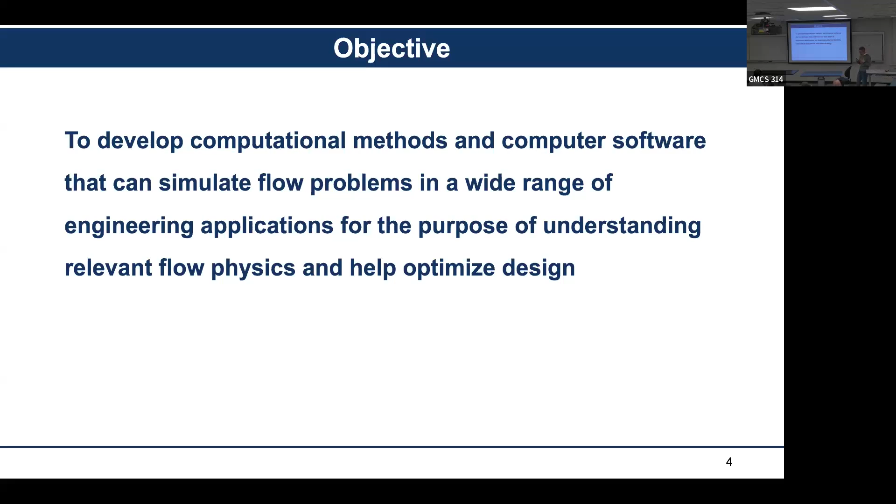And also being able to optimize the design of the airplane, the gas turbine engines, or the rocket engines. So I've been in this for quite a while, and we would like to have a computational package with different methods that is able to handle complex geometry, because most of the examples that I showed you that I was involved in involve a lot of complex geometry.

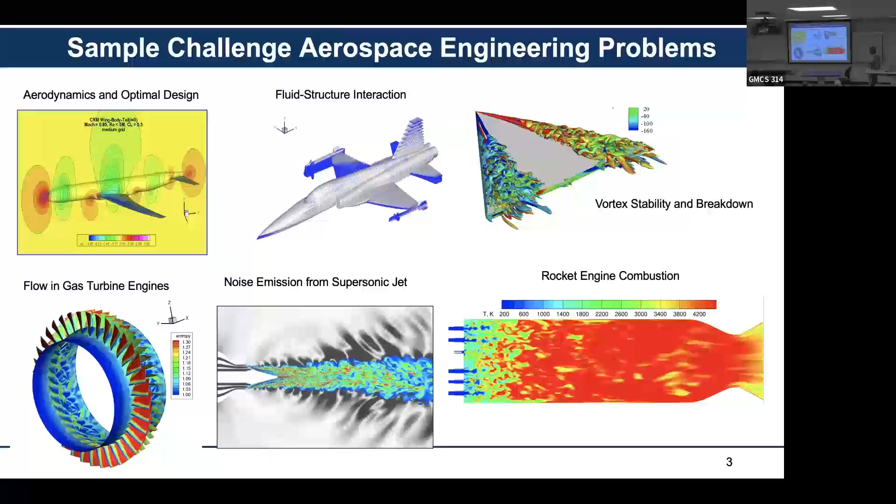And again, you can see just from the movies over there, we have a lot of spatial and time scales that we need to resolve. There are different scales involved in here, moving and the scales for the sound too. So we need to have a code that is actually able to resolve the different spatial and temporal scales. And that's always a challenge for computational science.

On one hand, you want to resolve the large scale of the airplane, the scales over the size of the airplane, say the Boeing 747 will be close to 70 meters or so. And then the Kolmogorov scale of turbulence is very small. And similarly in time, with sound emission, you are interested in 20 hertz to 20 kilohertz, the whole span. It's not just one narrow area, which would be easier to work with.

And so I want to basically motivate you students by saying there are tremendous opportunities because of the wide spectrum, time and space, and because of nonlinearity. Because if it's linear, you can always separate it, study each scale separately. Because of nonlinearity, the different length scales and different time scales all interact. One scale affects the behavior of the physics in other scales, and that's the difficulty. So there's a tremendous challenge in it.

And then the other thing is multiple physics. For this case, we have fluids and we also have structures. We have turbulence and we have reactive flows. At least the few that I have been interested in, or have had the opportunity to work on.

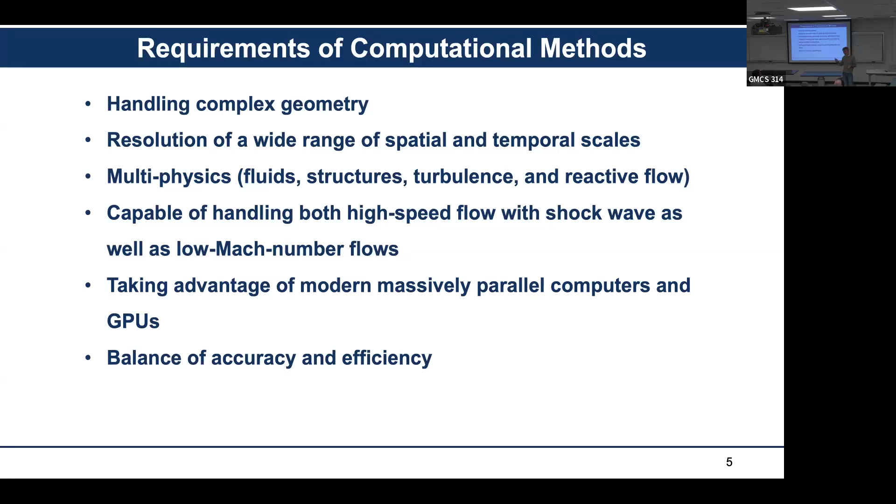Anyway, for the majority of our problems, we have to be able to balance efficiency, so that you can solve most problems, with the kind of accuracy you can get. And that's what we have had to deal with over the years. Because of these constraints and desires, we have developed a code called ParCAE, and that's extensively used for almost all my research, except some of the theoretical studies.

ParCAE was originally named as a parallel code for aeroelasticity, and we were doing aeroelasticity studies like the F-16 oscillations. Then based on that, we evolved it into a general purpose CFD code that solves the Navier-Stokes equations by the finite-volume method, on multiblock grids, and we can handle quite a few physics, including flow, heat transfer, fluid structure interaction, and combustion.

The central part is the Navier-Stokes flow solver, and then we have the aeroelasticity solver that's coupled internally, or through an external package too. And then it recently evolved to include the chemical reaction solver, and those are basically the major parts of this.

And ParCAE, as I mentioned, well, we haven't changed the name. We should take a different name. But one of my former students, Mani Sadeghi, who's now at Pratt Whitney as a lead aerodynamicist and aerostructure mechanist, named it ParCAE because I didn't have a name, and he said ParCAE was apparently some Roman goddess.

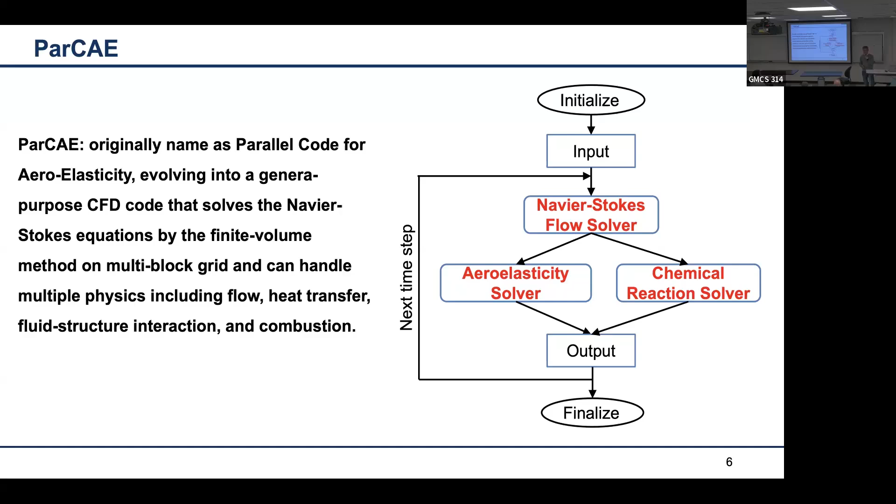Anyway, I'll just give a little bit of background on this. Here there are the three-dimensional Navier-Stokes equations, which also include an energy equation over here. This is formulated in either a stationary reference frame or a moving reference frame, where we want to deal with the rotor-stator interactions for gas turbine engines. So you could have a rotating reference frame, including Coriolis forces and so on.

Any body forces, where we have been using this to study plasma flow actuation, so we can include electromagnetic forces or ion forces in there. Over the years, we've built all different turbulence models. Originally, when I started the code, I coded only the SST turbulence model. Then we went into the SA and SST gamma with transition models, and the LES models, Smagorinsky, dynamic Smagorinsky, and WALE model. And we are incorporating all different technologies in DES, DDES, and so on.

These are just the basic equations that we were showing over here. We can treat two-dimensional, three-dimensional, axisymmetric. For low-speed flows, we have a preconditioner, and we are able to do subsonic and transonic flows. Originally this was all based on perfect gas, but because we're working with chemical reaction problems, where in the rocket engine we have non-perfect gas, we incorporated some non-perfect gas laws in there too.

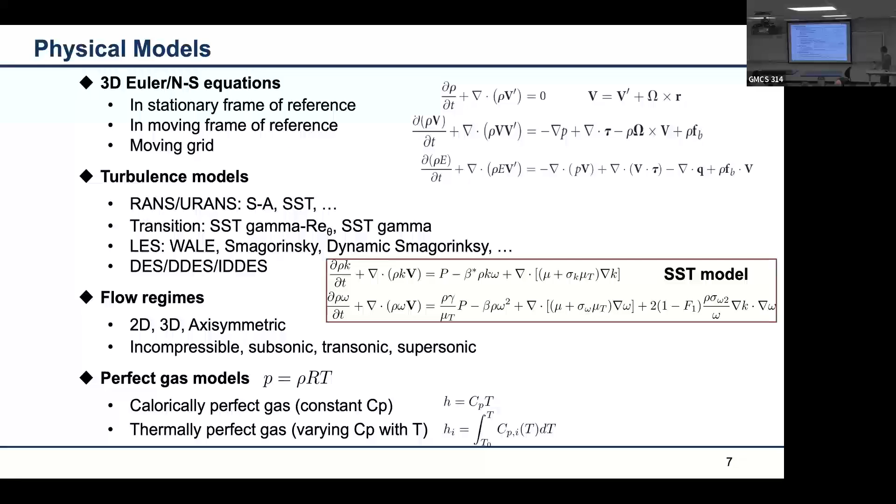This is the basic algorithm. It's very simple. It's the finite volume scheme. If you have a conservation law, and Revere was asking me why you call it conservation, this is because it's the divergence form. This is the source term, this is the variable being conserved, and then the divergence of the variable. Why do you call it the conservative form?

When you integrate it over a control volume like this hexahedron, you get the integral of the time rate of change of the conserved variable in this volume related to the surface integral. In other words, whatever flux is going through the surface, it's all conserved. If you integrate over the whole domain, the internal fluxes cancel, and what you have is the source term contributing to the rate of change.

These equations are very general, not only for fluid mechanics; you can formulate a lot of physical problems in terms of conservation laws. Now, we discretize it over a grid cell, like shown over here. The major problem is the discretization of the fluxes, how you represent the surface integral. We start from the integral equation because in principle we would like to be able to deal with shock waves. Shock waves are discontinuous.

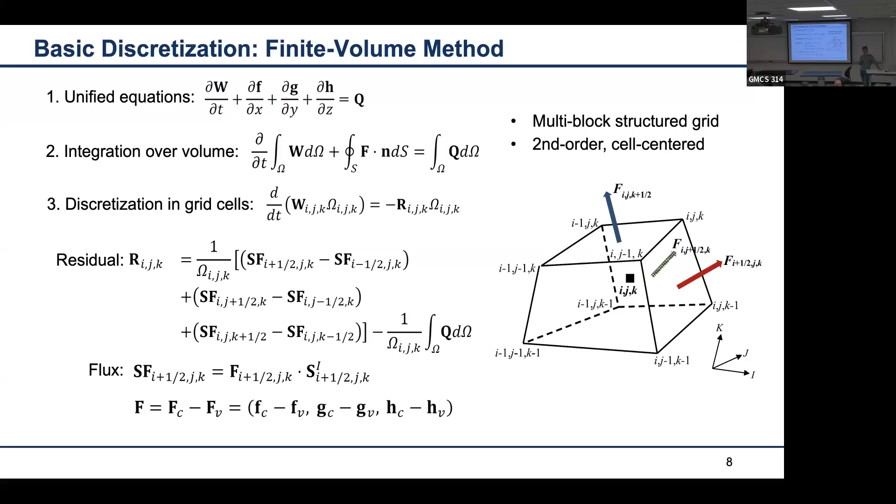That's called non-oscillatory solution. So in order to do the convective fluxes, there are various schemes that are currently more used in the community. Some of them are from our group. Some of them are by people like the Van Leer splitting and the Roe scheme, which has been very popular. And what we have in our group is mostly the JST scheme on our own.

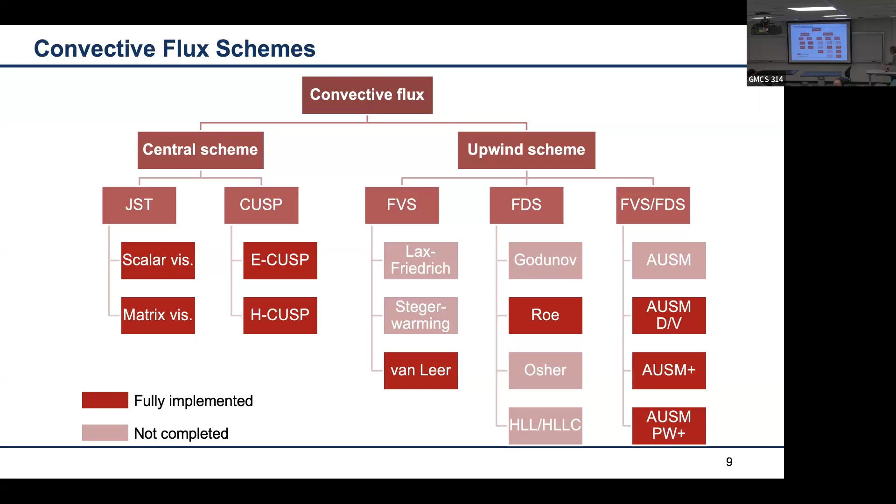Some of this is more from, I don't know. Fletcher knows him. He's at NASA Glenn too. He passed away already. I forget his name. It's actually Meng-Sing Liou. You don't know him, but anyway, he passed away because of cancer. He's about my age, but anyway.

These are the schemes. I'm not going into details, but this is the scheme that our group has been using, and it's basically simply a central differencing scheme, but with some numerical dissipation. But the dissipation has to be able to distinguish waves that travel in different directions. Because in flow problems, you know from characteristics that some characteristics go left, some go to the right, meaning that some waves will travel left.

If I'm standing over here, my sound goes left and right. But if I'm moving with the fluid, then some waves become faster, some waves become slower. If I move supersonic, all waves go in one direction. You cannot hear from the other side. Any numerical scheme, in order to handle the convection correctly, needs to reflect the original physics, in other words, reflect the wave directions. And this is just a way of distinguishing the different waves.

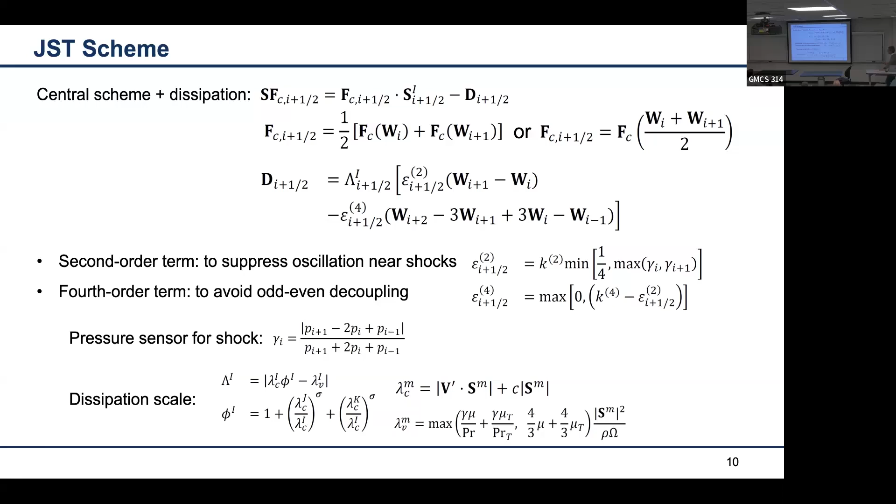And this is particularly important when you have a shock wave, and we have a shock sensor that will sense the shock and then decide what schemes we need to use. And this is the Roe scheme. Phil Roe initially started that approach, and then we have our own versions of it. That's basically what I was talking about: distinguish the waves due to contact surface, due to the upstream wave, expansion wave.

There's a shock wave. This is actually a rarefaction wave, this is an expansion wave, and this is a contact surface. In other words, we distinguish all of these in our algorithms in such a way that we can reflect the original physics and therefore produce non-oscillatory solutions over shock waves. And that's a major issue with high-speed flow. And this will be significantly more severe for high order schemes.

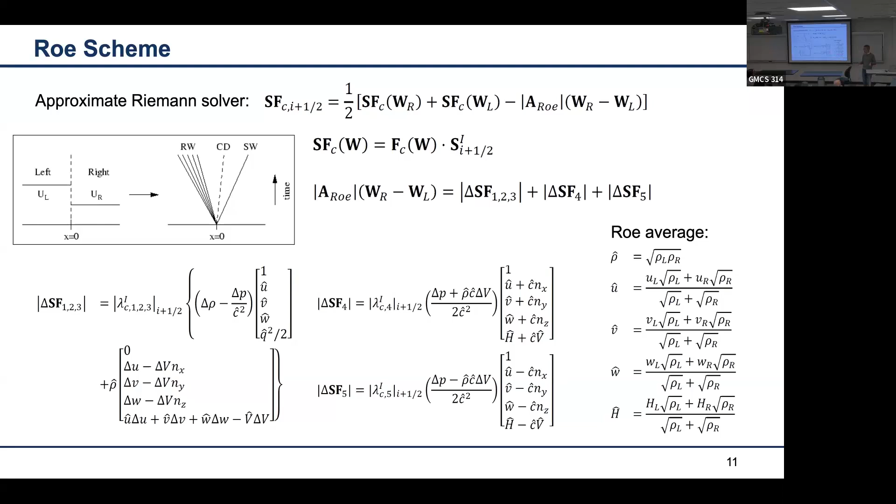High order schemes, in terms of mathematics, with a Taylor series expansion, the truncation error is proportional to the grid size to a higher order: third order, fourth order, fifth order. On the other hand, it uses more points. And you all know, even in interpolation, if you interpolate a function over more points, it becomes more oscillatory. It's more likely to produce wiggles. The same thing happens in computational methods. The way you eliminate that is to distinguish the different wave directions, using upwinding type schemes, and also using limiters.

And this is the reconstruction. It's like what I mentioned: given a set of points, how you would interpolate that function to construct the fluxes. The more points you use, the more accurate in terms of mathematical accuracy, but the more likely you are to produce oscillatory solutions. In fact, these are very relevant topics even nowadays, if you're doing machine learning and using neural networks.

And what neural networks are doing is more of a nonlinear type of interpolation algorithm, functional interpolation. And there, each neuron is basically represented by a lot of weight functions and an activation function. It's like providing basis for interpolation. The more neurons you use, it's like the more points I'm using in constructing my interpolation function in my numerical method. And the more layers you use, you are essentially stacking up more of these interpolations.

And then there is the issue. If you use more neurons, more layers of neurons, deeper learning, you're more likely to fit more data, and you need more data to do that. And you're more likely to have a better, accurate prediction. On the other hand, your solution is more likely to produce hallucination too, because if you extrapolate using this type of thing, it gets nonsense, right?

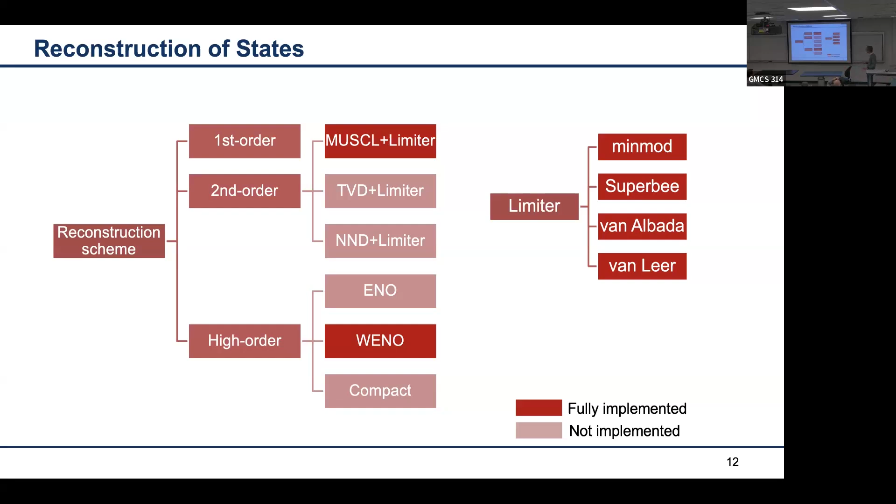So it's actually relevant in the sense we have to balance somehow reliability versus validity or accuracy. And considering all these nonlinear problems, the limiters, I'm not going into details, but we have implemented some, including WENO, and I saw on the second floor your center has students working on a third order WENO scheme. So these are the few things we worked on. Some we implemented, some we didn't think were worth it, and some we did our own versions to tailor to our particular applications.

This research is very relevant because even in the modern machine learning era, many concepts are very much related. Interestingly enough, we just had our program review on Tuesday from the Navy. We're doing turbine-burner research. And before that, we had an Air Force project, and a different Air Force program manager passed by our program.

You probably know Chiping Li, and he was saying that at his contractors meeting, mathematicians, physicists, and engineers were all together, talking about using data simulation, the new machine learning type of methods, for studying rocket combustion problems. The mathematicians talk one language, the physicists a little bit different. But in the end, the mathematicians always say, we have this mathematical trick to do this and that. And what he was saying is that a lot of these mathematical tricks that worked can be traced back to some physics that you obeyed, and therefore it worked. That's interesting.

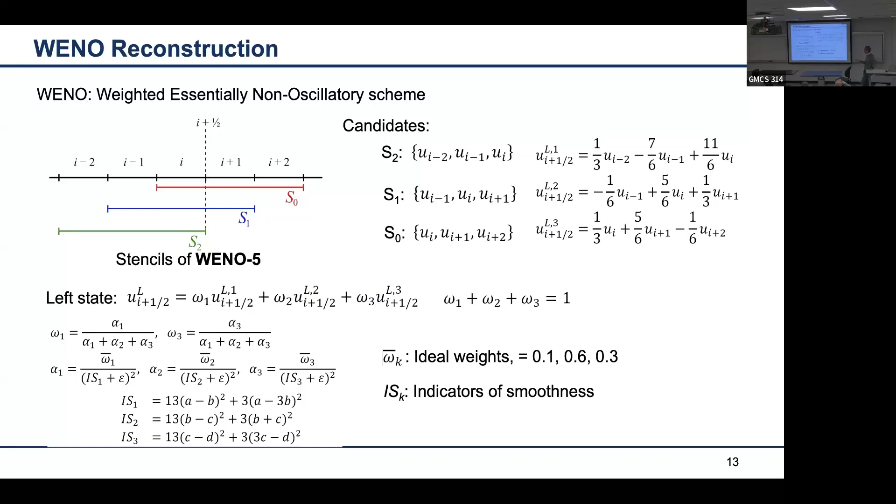I was thinking that with a lot of these numerical schemes we developed over the years, we also have the same issue: we really have to think about the original flow problems. What are you trying to resolve? What are the physical wave propagation or diffusion mechanisms? Okay, I think I'm taking too much time.

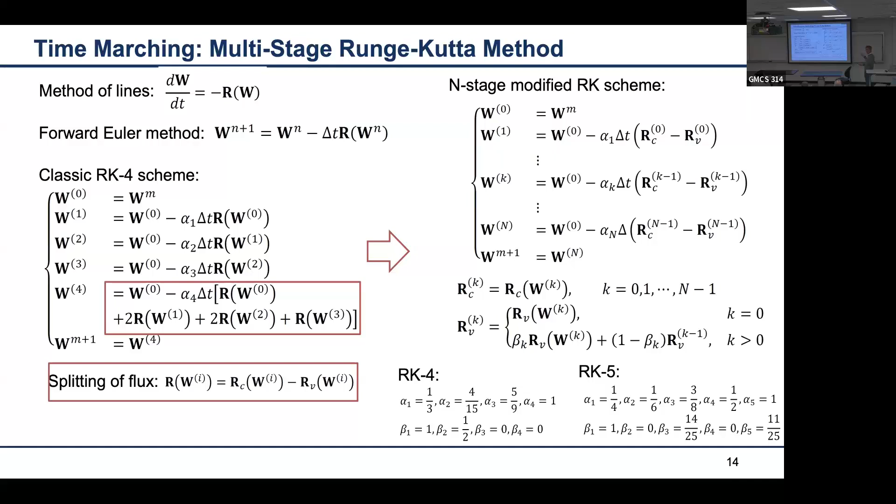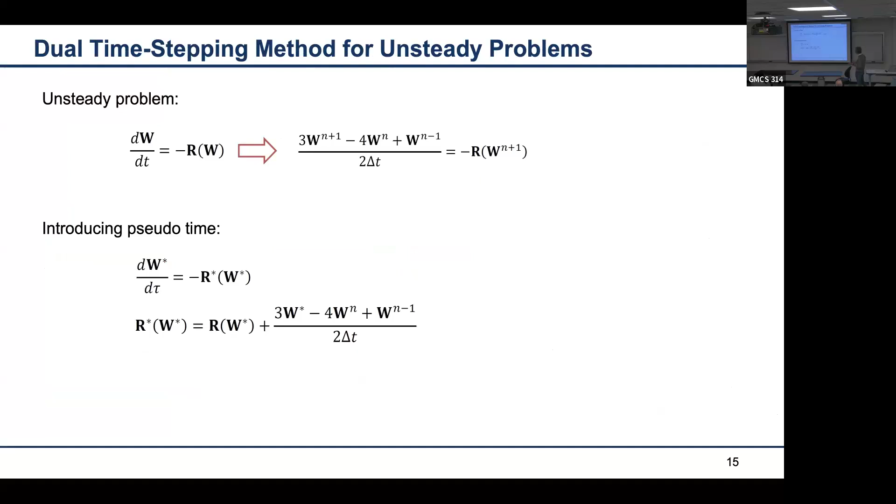Now, we have developed our own. I saw downstairs a student presenting on a third order Runge-Kutta scheme. We have our own newly developed Runge-Kutta scheme. We usually use a 4-stage or 5-stage scheme where we tailor our coefficients based on stability analysis, and we have a way of splitting the diffusion and convection. Our Navier-Stokes equation is basically diffusion reaction. We have a way of doing time accurate using the pseudo-time method. I'm going to skip that.

But the major thing here is we formulated an implicit LU-SGS method, which can be effectively applied on parallel machines, taking advantage of a splitting algorithm to handle the stiffness due to chemical reaction. With chemical reaction, the time scales can be widely spread, some reactions very short, some very long. Our numerical scheme time step is always limited by the shortest time scale, the fastest chemical reaction. So we have to handle them separately.

We attack this problem in several ways. One is mathematically in the numerical method, so that we will be relieved of the stability limit.

But on the other hand, you can only do so much on that. And also, as I was saying, if you do not respect the original physics, if the original physics is dominated by a very short time scale and you're not resolving it, you're not going to expect to have good answers, right? So somehow you have to deal with these short time scales.

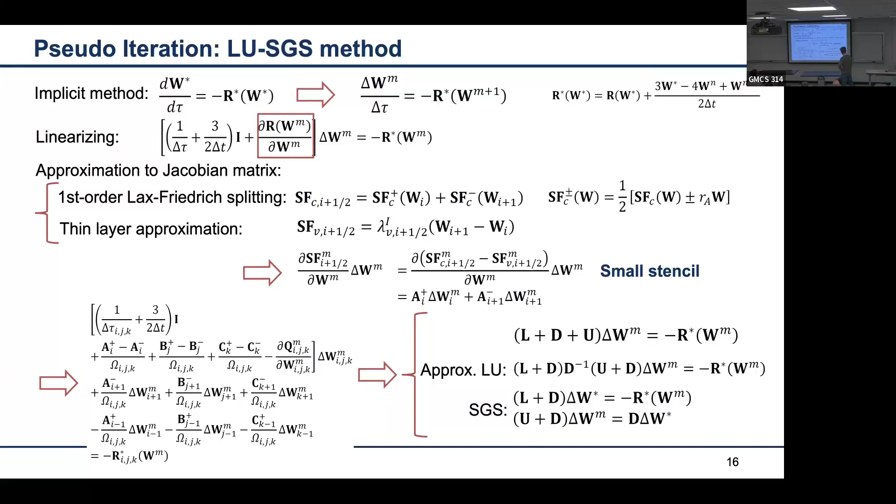But that's what I'm saying, that we are attacking the physical problem in various ways, from the computational side and from the physical side. And Professor Sirignano was the one who was actually developing these flamelet models that handle the stiffness problem with the chemistry. And Pavel actually made quite some contributions over there, I remember.

Now, as I said, we have to handle multiple complex geometries as well as moving reference frames. In a gas turbine engine, the rotor and stators are moving relative to each other. So the grids can never be really big, unless you can represent everything together as unsteady, accounting for the blade motion. Otherwise, it's very difficult.

So what we do is one stage. One reference frame is attached to the rotor, one reference frame is attached to the stator. But in between, we have to somehow pass information, and this is what we call a sliding mesh algorithm. So we have various ways of passing the information between the different rotor blades, but reflecting the original physics.

These information passing methods are not only needed for the physical boundaries, but also, since we're doing parallel computing, we have to pass the information between different CPUs. So there's a lot of implementation as well as theory related with that, because we need to be able to conserve energy, mass and momentum. And of course, in reality, this type of thing is very sensitive to what variables you choose, what the effect is in terms of the entropy if you conserve momentum only and not energy. So we have quite a few studies on that, and we have different options for doing this.

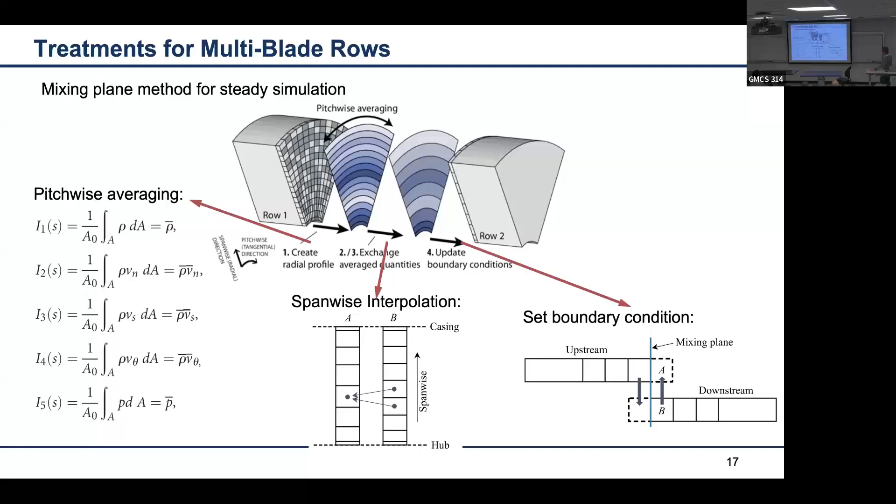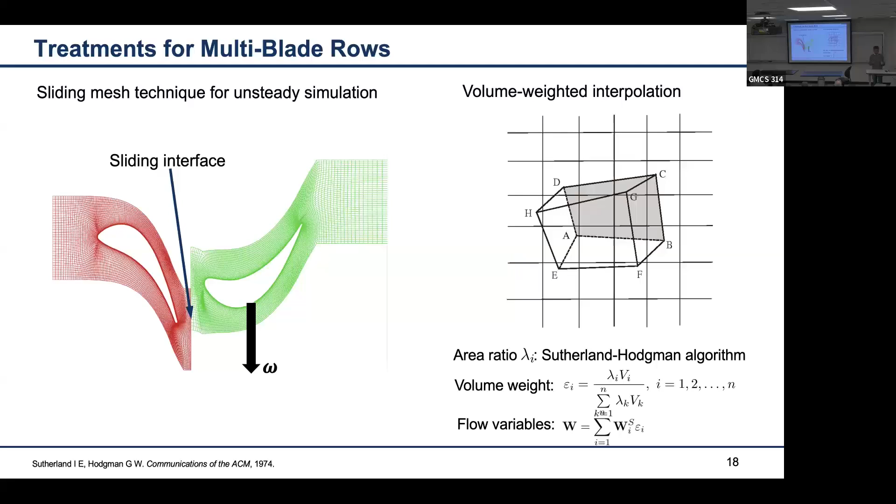Now, I'm not going to go into details. I have 10 minutes more or so. So let me give you some of the examples we did. This one is showing how we treated multiple blade rows by doing sliding meshes and the interpolation method that can preserve the original physical quantities, the physical conservation laws.

Of course, we have to deal with MPI and massive parallel computing. Most of the computations I'm going to show are done on the DOE machines. It's nice they have big machines, but the problem is you have to wait in the queue for too long. And of course, we're on the lowest priority because our work is what they call release A, which is basically no restriction, but you still need to go through the security clearance. But we are on the lower priority in terms of the computers.

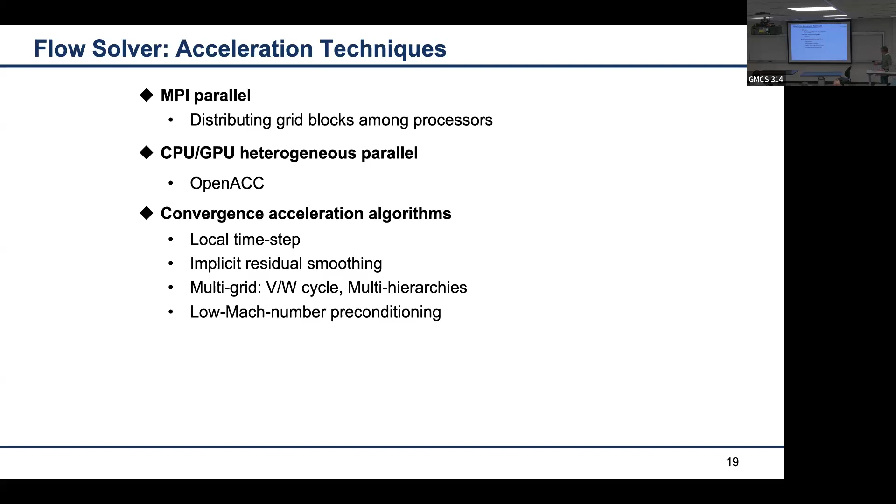But we do have all the different parallel algorithms we can use. I mentioned that, in order to treat the chemical reaction terms, we have developed our own splitting methods that are able to take into account the chemistry and turbulence modeling related to the source terms. The stiffness all comes from the source term.

Chemical reaction: this is actually a species transport equation. Y sub I is the species mass fraction, and there's a source term which is basically reflecting the reaction rate for each species. And then there's the transport properties, and all these are coupled to the energy equation and the chemistry over there too. The turbulence model has turbulence production equations there.

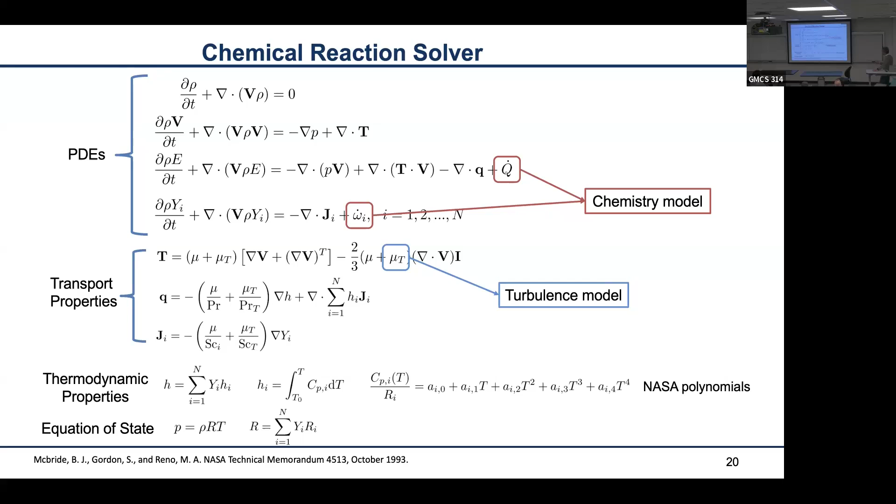And those are taken into account in our time-marching splitting algorithms, which not only allow us to march in time efficiently, but also, if I do reach a steady state, will preserve the steady state. In other words, it doesn't depend on the time-marching algorithm.

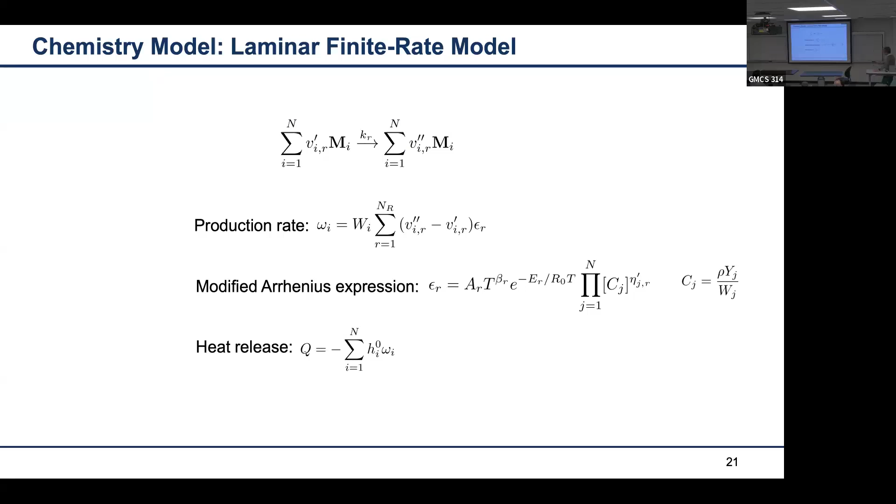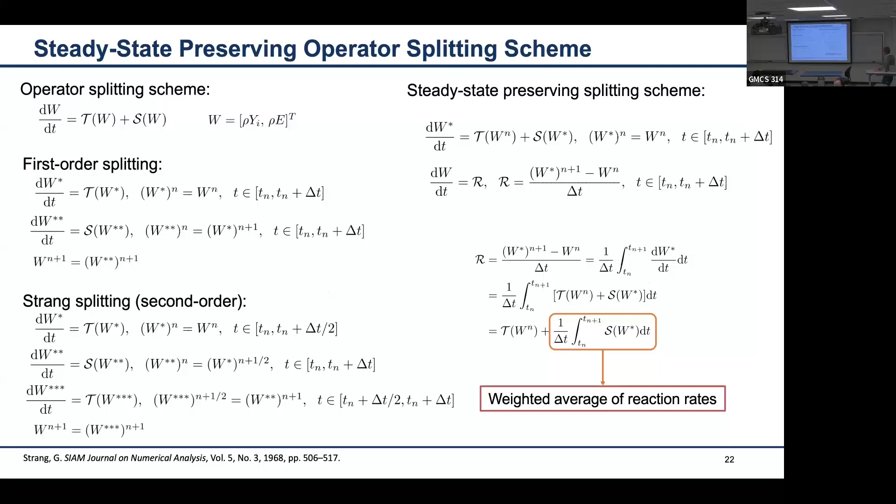All right, the finite rate model, I'm not going to talk too much about that. We're usually using a very simple model. Yeah, that's our splitting scheme, too much detail in there. I'd be happy to discuss this with anyone, but the aerodynamic side, I'm going to skip that. Let me just show you a few examples and the challenges of each problem.

This one is the Onera M6 wing. It's a transonic flow case. In other words, it's just the airplane. The wing comes in, and we generate a multi-block grid. At the time when we were doing this, being able to do a complete wing was quite complicated. But nowadays, we just do it. Anybody gives me a geometry, we'll be able to do that.

So here, what is shown is a pressure distribution. The blue is low pressure, and all of a sudden there's a line over here where it becomes higher pressure, which is essentially where the shock wave is. And the shock wave gets stronger near the tip region. Shock waves give vibration, also pressure loss, and therefore drag for airplanes. And that's a major problem for what are called transonic flows.

In other words, the flight Mach number is actually less than 1.0. The 737's cruising Mach number is about 0.7; the original 737 is 0.76 or so. Now it's a bit higher, but the 787 can fly at Mach number 0.86. On the wing, the Mach number is actually beyond 1. It's supersonic flow, and you can see a shock wave.

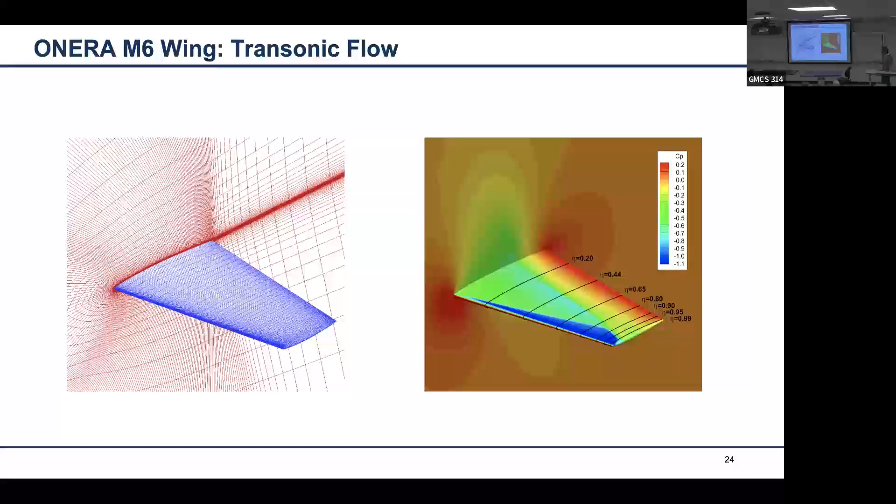Being able to predict these shock waves is the key. The shock waves are reflected over here. This is the low pressure, meaning high speed, supersonic flow, and all of a sudden it terminates with a shock wave. This shock can trigger boundary layer separation, causing vibration of the wing, as well as an increase of drag. So being able to capture these shock waves is the key in airplane design, and that's where we have made contributions in predicting the shock waves accurately.

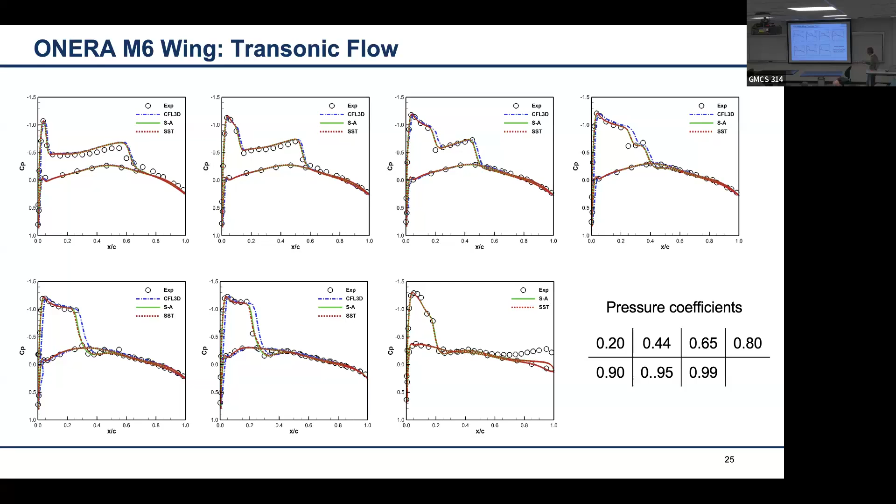It's actually just a very simple flow. It's a flow across a circular cylinder, and everybody in fluid mechanics studies that. For inviscid flow, it's actually just a potential flow, and you can estimate the flow is symmetric backwards and forwards. But in viscous flow, it's never like that.

When you're at a low speed, your landing gear is pretty much like a circular cylinder, so the flow coming in, you actually feel it next time you fly, when you get to land.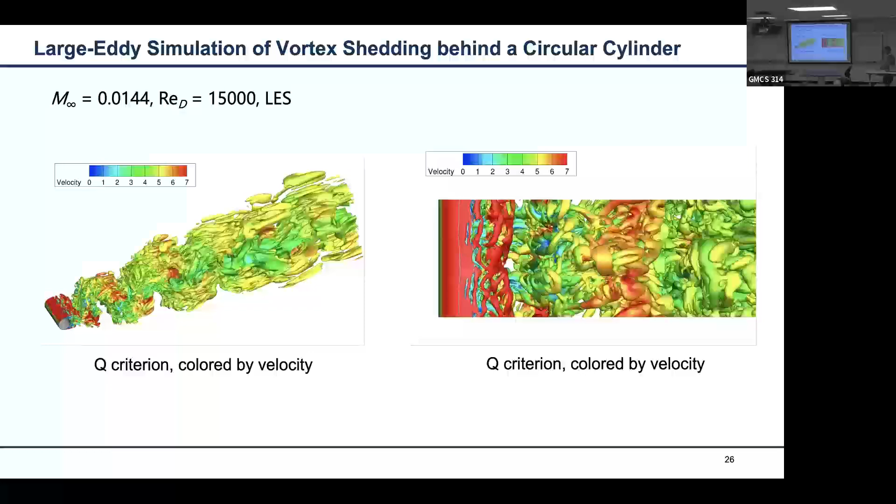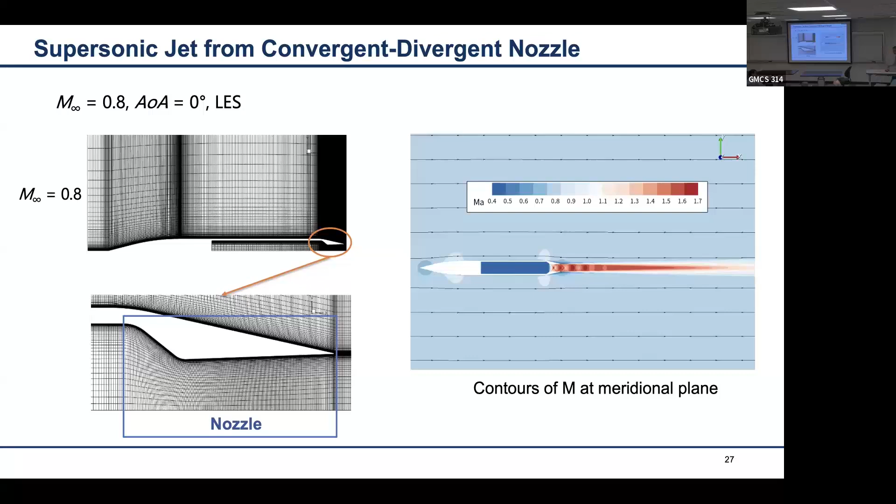Okay, so this is the type of things we can do. And this one is a supersonic jet, and we are very much interested in the performance of the jet. Has anybody looked at a rocket launching? You can see that behind the rocket, there's this diamond structure. They call it the jet diamond structure. And that, of course, has a lot of effect on noise, a lot of effect on the signature of an airplane, IR signature or other signatures. That also relates to the performance. So this is the type of things we are simulating.

This is a large-eddy simulation, able to resolve the shock waves intersecting with each other, being reflected from the free stream. The jet is coming from the engine, and for the outside air, we are simulating a flight condition. So the flow from the outside of the airplane forms a shear layer, and there's a shock wave from the supersonic jet that hits the shear layer, is reflected, and then interacts with the bottom one, and these are traveling, and you can see this diamond shape. But this shear layer creates a lot of turbulent eddies, and the shock waves and these shear layers create sound waves.

And this is the more detailed, what we call Q-criterion colored by vorticity. So you can see all the different structures. What we do is we take these eddies. These eddies send pressure perturbations, which is basically sound, noise radiation. But if you just use the Navier-Stokes equations to propagate them out, you get garbage after a while, because all our numerical methods have some level of dissipation. Sound waves are so tiny, and unless you use tremendous resources, there's going to be some numerical dissipation, and you will not be able to resolve the far-field sound.

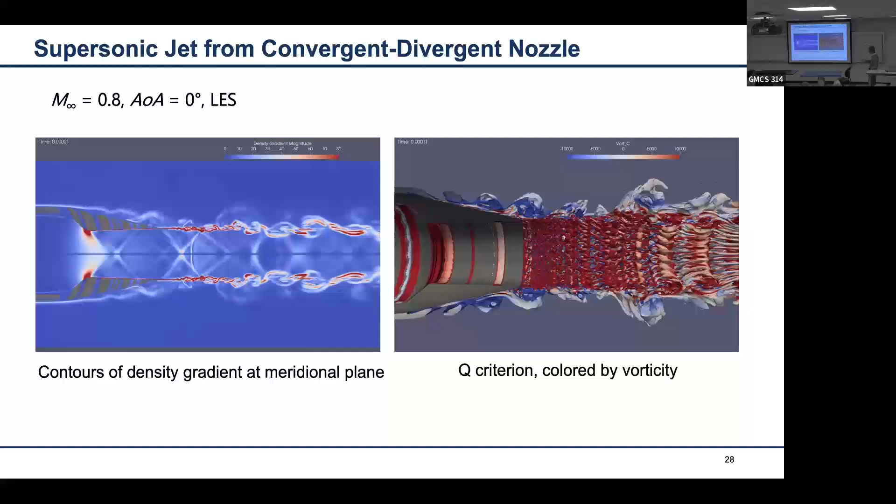So what we did is develop a Green's function method based on the Ffowcs Williams equations. Then you can take this signature from the near field and propagate the sound signal to the far field, and look at the sound signature. So we will likely be able to modify the nozzle and reduce the noise levels. And here's the one that NASA funded us on for this project.

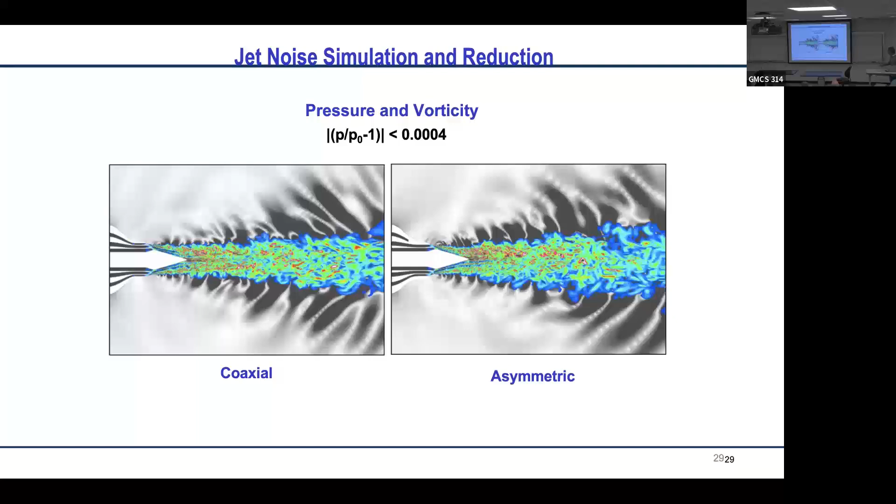So here is, yeah, you can see the noise signature propagating, and we have two different coaxial jets, or asymmetric jets, and we're able to show that by doing the new design, we're able to reduce the sound level by 12 dB in some areas, and that's significant. 12 dB. dBs are magnitudes of sound pressure level. It's very difficult to do, and we have numerical simulations coupled with.

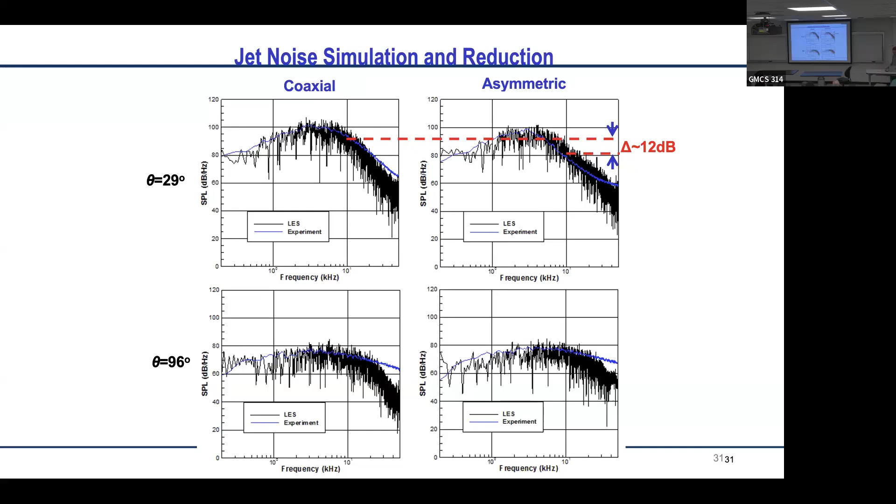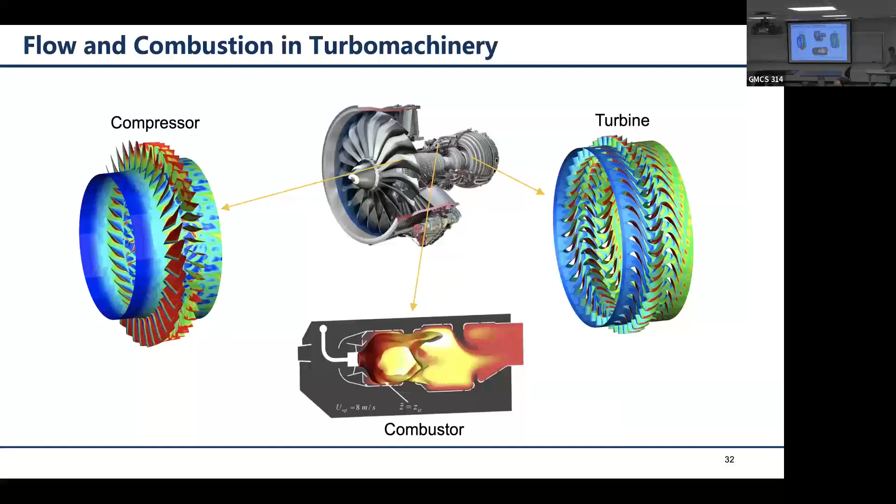So here I'm going to go quick. This is actually the turbine-burner concept, where we are simulating the flow through a turbine rotor. This is the turbine. It's a 1.5 stage turbine, meaning we have 3 rows of blades. And I'm going to go through all this just to show you. This is with transition simulations.

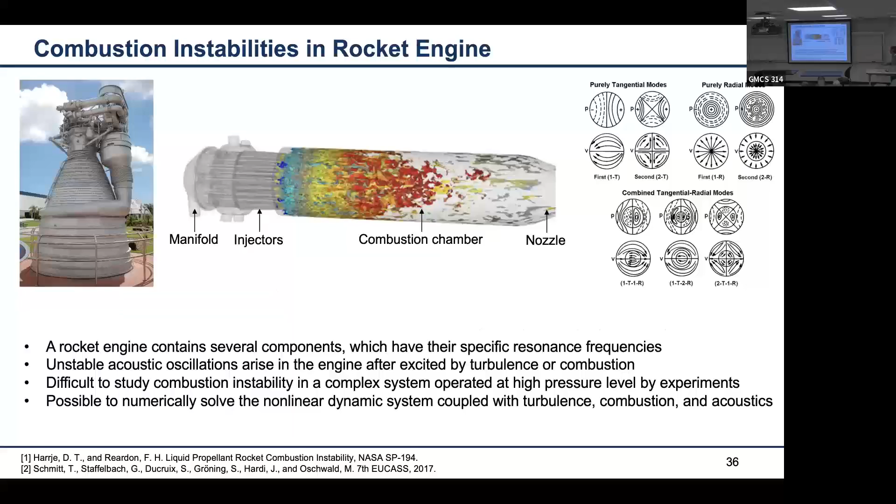The rocket one, I really try to have the rocket. This is the rocket one. This is Pavel's work. He at least touched on this. This is where we are doing the simulations. There are 42 injectors coming off upstream, and then they ignite, burn, and then they go downstream. What we are interested in, these are the injecting ports. So we actually simulate the grid for all the ports inside the LOX posts, and then there's also the main combustion chamber.

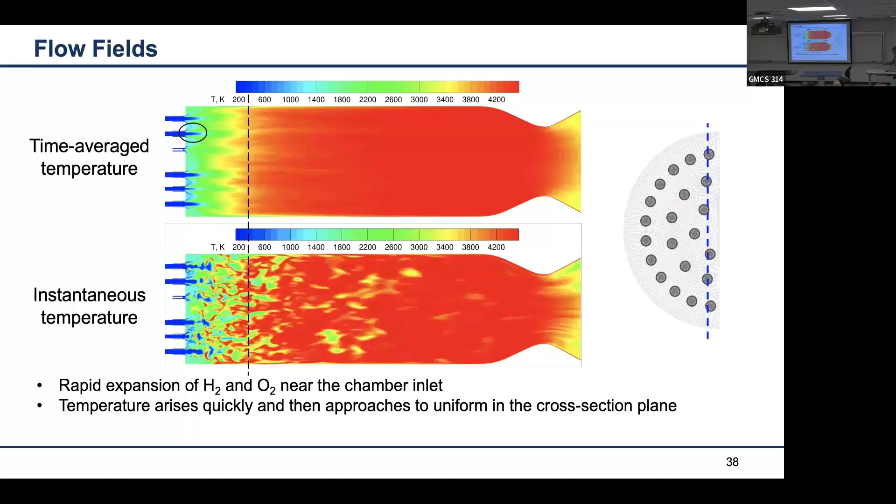And what is important is that we need to resolve the pressure signals. The instability will develop in the chamber. The combustion enhances the pressure perturbations, and if they go in phase, then you can end up having the pressure grow and then cause damage. Pavel is familiar with the problem. And after our 3-dimensional simulation, we use DMD to decompose and identify the different instability modes that exist in the chamber.

Okay, I'm going to go on. The turbine burner concept, I can give a separate talk on that in the aero department, where we propose burning. Usually it's in the combustor, but we are proposing to burn not only in the combustor, but actually continuing in the turbine itself. Usually people worry about high temperature, but in the turbine, you realize you're taking out more work. So if you burn while taking out more work, you can maintain a constant temperature.

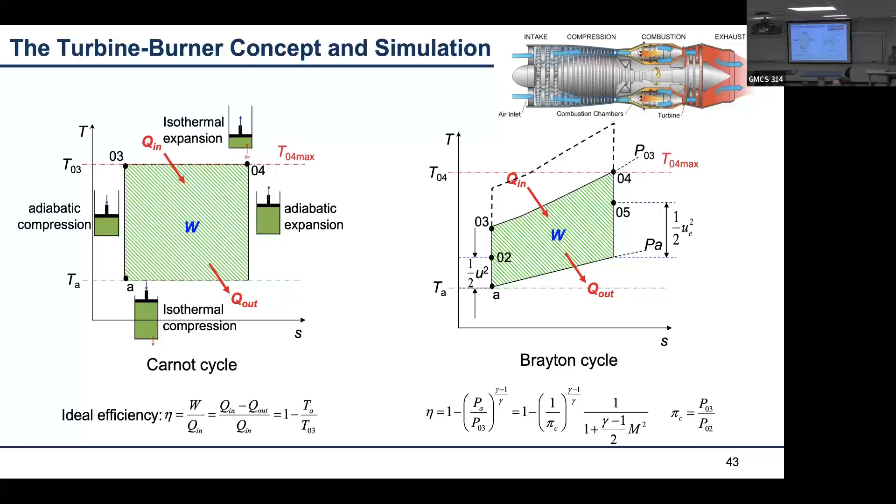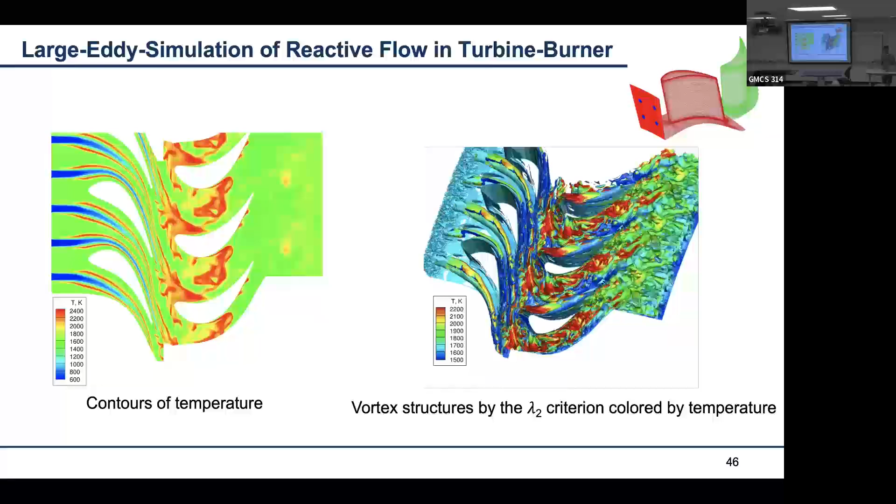And by doing that, you will actually approach more of the Carnot cycle, constant temperature burning. You can actually get more thermal efficiency and therefore higher thrust levels. I'm not going to go through this. This is the recent Navy project that they funded us on, exploring injecting fuel. These are the injecting ports, injecting fuel in the turbine stage, and we're looking at how it will react, looking into potential redesign of the turbine blades to absorb this heat without exceeding temperature limits to provide more power.

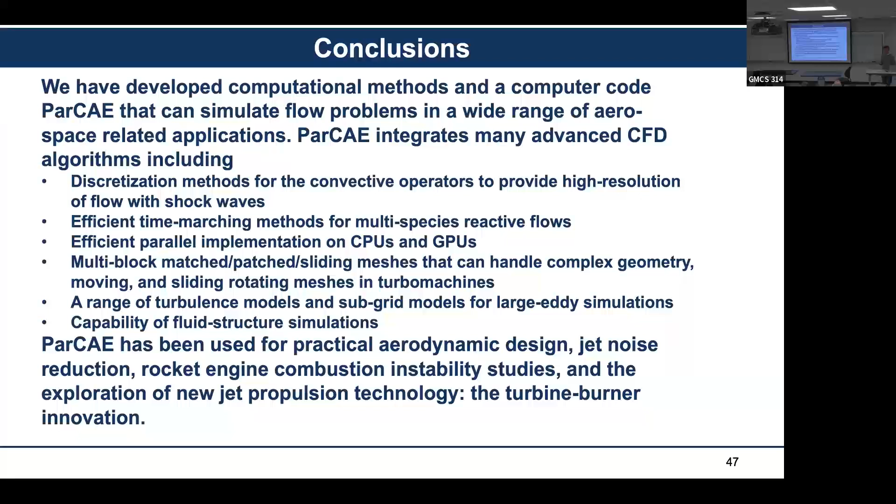Okay, I'm just going to summarize. I'm going to skip summarizing what we did and what our code is capable of. Instead, I'm just going to point out a few directions I'm interested in, and I hope some of the students here in the joint PhD program or masters would be motivated to go into a PhD and would be interested in working on them.

And here's what I think. We have done a lot of numerical methods for the applications, and I think next we would need to develop high order schemes. But the high order schemes have to preserve the merits of our current finite volume schemes. This will include being able to handle complex geometry and provide non-oscillatory solutions of shock waves. And we have to have high order accuracy, but without excess increase in computational time and storage. That means we really have to think about how to take advantage of the GPU structure.

And we have to also develop an effective method to treat stiffness due to chemical reactions. And of course, there is the physical side. You have to have better turbulence closure models, reaction models, real gas effects, and whether we use machine learning to develop these turbulence closure models and reaction models. I think those are good areas we can go.

And two-phase flow, and this is my personal interest, because as we're working with the Navy, they were very much interested in these detonation engines where you have shock waves, and they want to use liquid fuel. The Navy doesn't want to use hydrogen. Okay, we're talking about hydrogen technology. When I talked to them, they said, "Well, forget about it. If you want to do hydrogen, don't work with us. We don't want hydrogen on board."

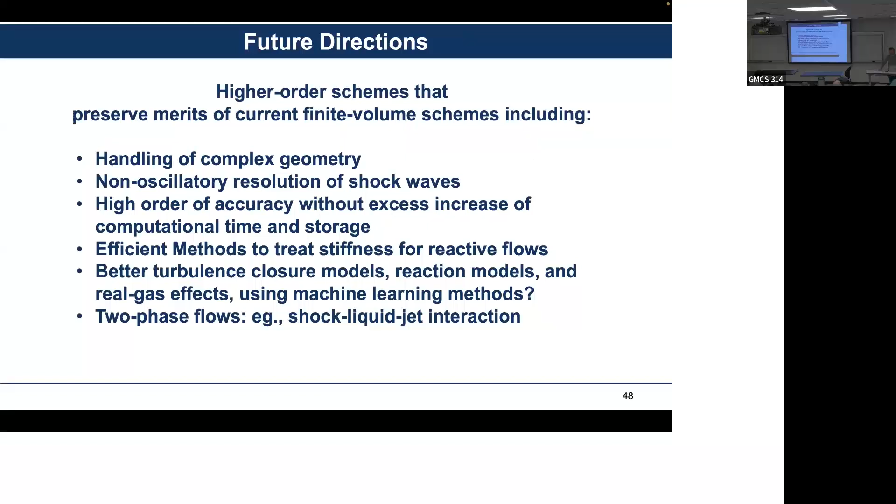Any other questions? Yes. One quick question, just to get your confirmation, because you are an authority in CFD, and we have a lot of students over here. Do you use the Euler equation for your code? Euler is the equation without considering the physics terms. But how can you make sure that your simulation still conforms with the physics? So what is the key point over here?

No, almost all the results we're showing were not solving just the Euler equation. We're solving the Navier-Stokes equations, which have viscous effects, diffusion, and reaction in there. The only Euler equation result was the F-16. That's because we're interested in the flutter situation. In flutter, it's mostly the pressure force on the plane that is exciting the structural vibration. In that case, we're using the Euler equation.

The Air Force had a program in Florida called SEEK EAGLE, which is essentially doing flutter simulations for their fighter planes. Every time they change what they call a store, which means a weapon or missile, they need to rerun simulations to map out a flight envelope telling pilots where they can fly and where they cannot fly.

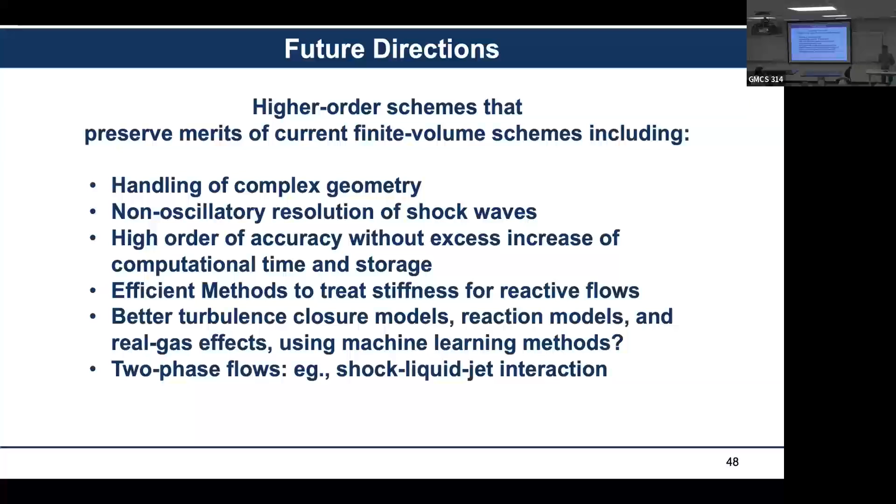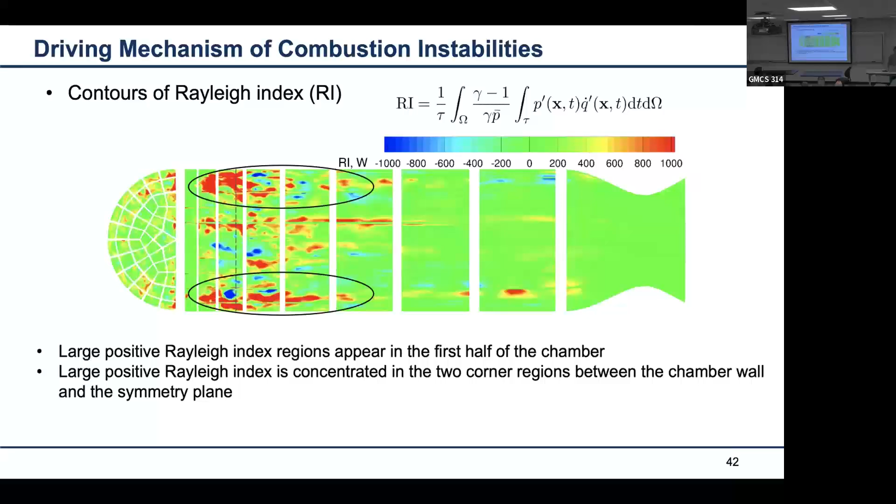Okay, very quick point. There's one slide that shows you solve the acoustic wave field differently from the turbulence field, right? For the rocket. Was that solving the Helmholtz equation? No, it's not the Helmholtz equation. It's basically based on the Large-Eddy simulation, time simulation of the whole chamber with reaction and everything.

It's actually using dynamic mode decomposition. So you have your numerical simulation time sequence over the whole chamber, and then you do the dynamic mode decomposition, which will identify the most energetic frequencies and the mode shapes. If you have an original Helmholtz resonator, DMD will automatically reveal that. But of course, in our case, it's not a pure Helmholtz resonator problem. It has reaction, it has everything in there, and therefore whatever mode is identified is different.

So we compare with experimental data to say whether it's the first mode tangential, lateral, or let's say longitudinal and transverse modes. So we were trying to identify them with DMD analysis of our CFD simulation data, but it's purely a Navier-Stokes Large-Eddy simulation data set.

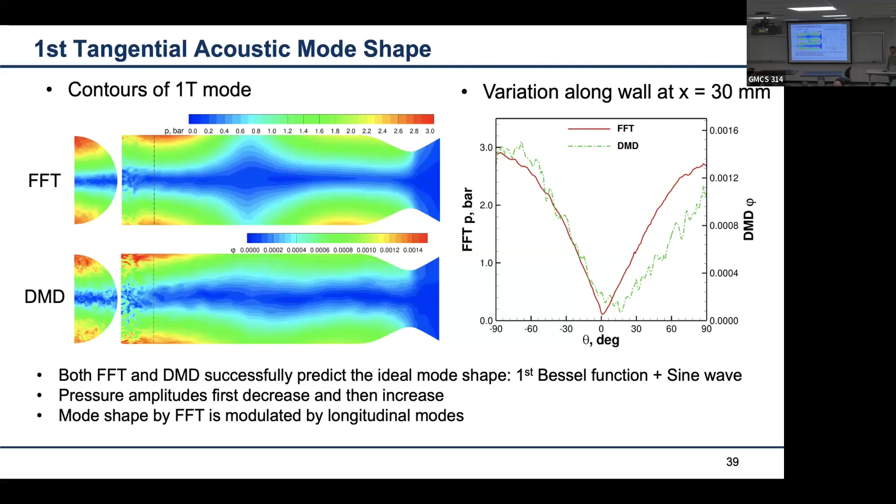So a lot of work with my postdocs, Yalu Zhu and Juntao. I think you met Juntao at the time. He's now at NASA Ames, and for a time he was able to still live in Irvine while working at NASA Ames, but I don't know about now. I haven't seen him lately.

And then Professor Bill Sirignano, who was for the rocket engine, basically, and Dimitri Papamoschou, who was an experimentalist on the jet noise, and that's where we got the NASA support with him. So these are the major contributors, along with a lot of other students. Along the way there were many students, but Juntao and Yalu were the major co-developers.

Working in a university environment with each student contributing something, it's very difficult to maintain the code, because once they leave, you don't know where it is. It's not like a company that can continue on that. I have pieces of code scattered all over. So these two were able to somehow integrate them, and I try to maintain some sort of consistency. It's part of a university.